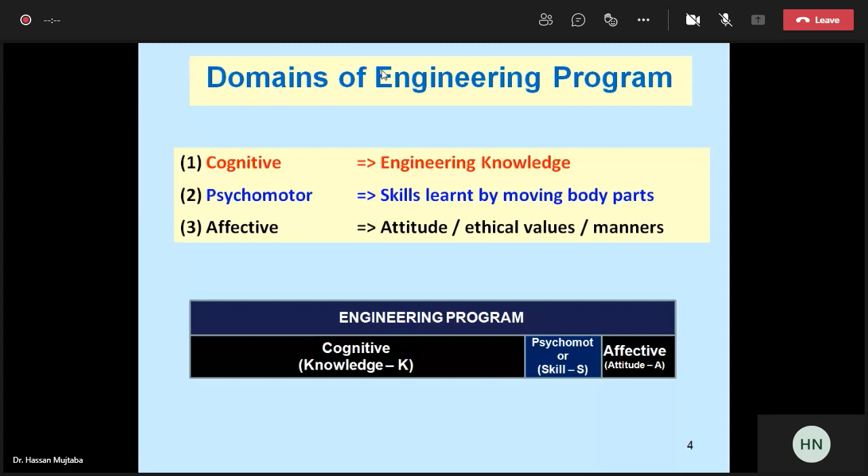Next comes the affective domain, that is attitude, ethical values, manners. All three combine together. Normally when we take the exam, we assess the cognitive domain, psychomotor in the lab, and affective based on the discipline you show in class. So these are the 3 engineering domains which are covered.

Now, the benefit of OBE is that it's a continuous quality improvement process. Based on the experience of previous graduates, or based on your experience and suggestions, topics can be included in the course, or we modify various segments of the course. That is the continuous quality improvement cycle.

Now regarding outcomes or objectives, the first one is the program. Your program is the civil engineering program. PEO stands for program educational objectives, and PEOs are assessed from alumni after 4 or 5 years of graduation. Then comes PLOs, program learning outcomes, assessed from graduates at the time of graduation.

Then CLOs, these are the course learning outcomes. PEOs, PLOs, and CLOs all have to be assessed. PLO is for the program, and CLOs are for one specific course. For transportation engineering, we have 4 CLOs. At the end of this course, you would be able to address these problems or issues.

Now, program educational objectives - there are 4 of them. You must remember, in the corridors when you're coming into the class on campus, they are displayed over there. So you should know that you have 4 program educational objectives.

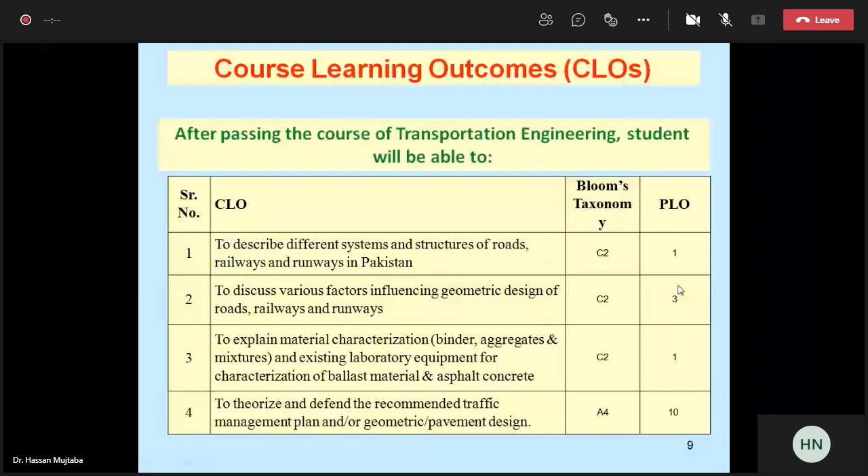So regarding bitumen, please remember one thing - bitumen and asphalt are essentially the same thing.

Americans use the term asphalt cement, while the British use the term bitumen. So it can be used alternatively - bitumen, or asphalt cement, or just asphalt.

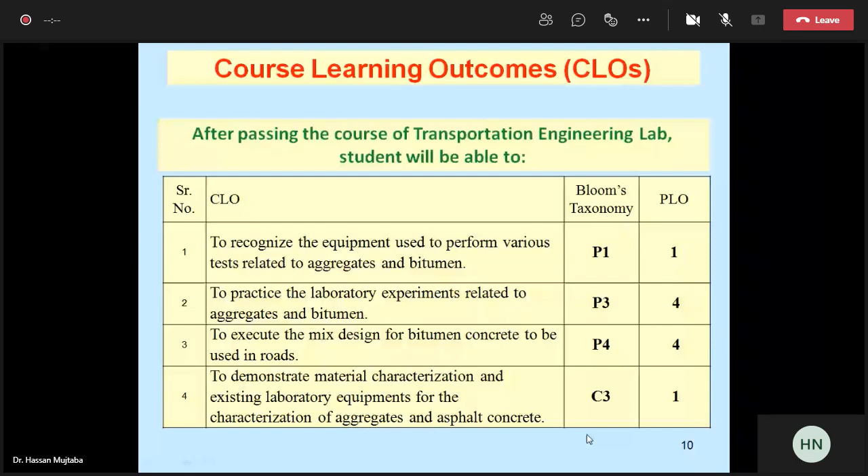Now regarding the reference books for this course, these books are available in the main library reference section. The first one is Highways, fourth edition - maybe the sixth edition is now in the market, but our library has the fourth edition by O'Flaherty. It's a good book.

Then Principles of Highway Engineering and Traffic Analysis by Mannering and Kilareski. Then Introduction to Transportation Engineering by James Banks - you may take this as your textbook for geometric design of roads. We are going to follow this book, especially for horizontal curves and superelevation diagrams. So the lectures are from this Introduction to Transportation Engineering by James Banks.

Now one important thing is, as far as books by Western writers are concerned, they are going to discuss road, railroad, and runway simultaneously. But in case of Asian writers, like Indo-Pak authors, they discuss these separately - separate books for highway engineering, separate for railway engineering, and another for airport planning and design. So these are the books.

Then Transportation Engineering by Khisty and Kent Lall - your traffic analysis studies are from this book.

Then Highway Engineering by Paul H. Wright, Highway Engineering by Oglesby, and A Policy on Geometric Design of Highways and Streets - that is the Green Book by AASHTO.

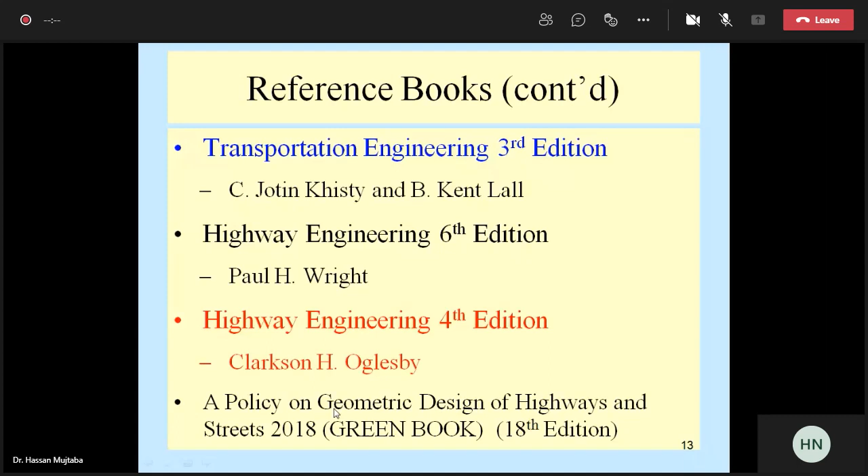Then regarding railway engineering, there is one manual - the Ways and Works Manual, by Pakistan Railway.

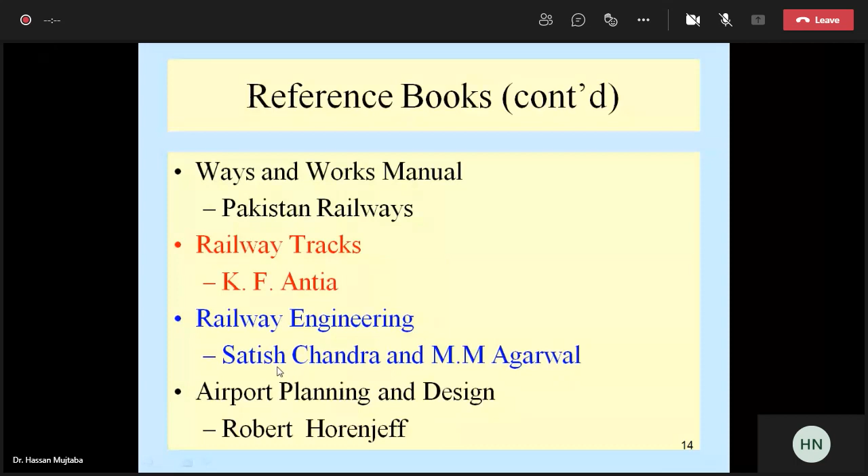Regarding the course contents, we would be discussing what is transportation engineering, a brief intro, then elements of a typical cross section of the road. If we talk about a road, the different elements are the wearing surface on which you are moving, then the base course layer, then the sub-base course layer.

At the bottom you have the subgrade or soil. How to assess the properties of these materials, whether the material you are going to use as subgrade or sub-base material is suitable or needs some improvement. We will discuss this, plus material characterization, which you have studied in geotechnical engineering 1 and 2.

In transportation engineering, you are going to study the characterization of the aggregates, because in your two layers, base course or sub-base course, you require aggregates. So material characterization for the aggregates and material characterization for the binder you are going to study.

Then design speed. How you are going to fix the design speed based on your capacity, lane capacity. Like in case of the motorway, maximum speed is 120 kilometers per hour, minimum speed is 80 kilometers per hour. How have you fixed this speed? Similarly, lane capacity, what is the level of service of the road?

So we are going to carry out the traffic analysis. Based on that, we are going to fix the design speed. Then capacity reducing factors.

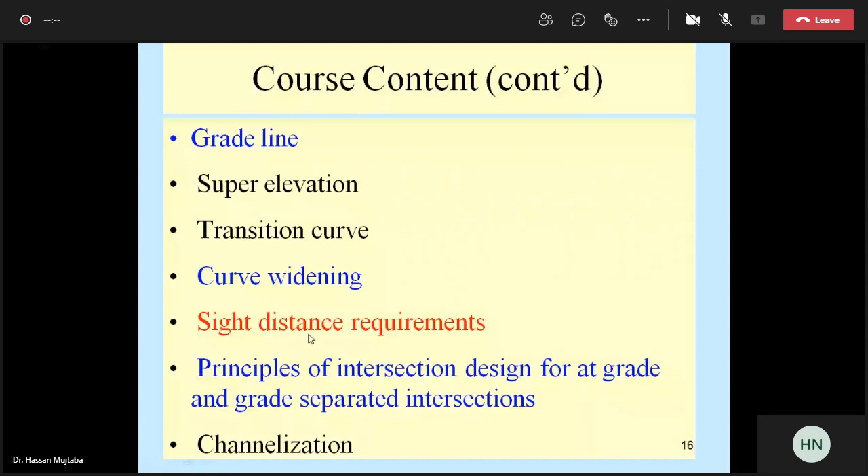Then highway construction materials and their properties and tests. We will discuss this in the lab portion - what are the construction materials, how you can ascertain good quality material to be used in road construction, and what tests you are going to carry out to characterize these highway materials.

Then characteristics of the drivers, vehicles, and roadways. Drivers, then pedestrians - the person walking on foot is the pedestrian. So when you are going to design the road, you have to take this into consideration, especially in urban areas.

What are the characteristics if heavy vehicles are being used - you have seen at every exit and entry point on the motorway, they have placed weighing balances or weighing counters. They just say, okay, you can travel on the motorway if your load is within the prescribed limit. If you exceed the prescribed limit, you are not allowed to travel by motorway.

In case of the GT road, you may see trucks that are overloaded, and that is the cause of quick deterioration of the road. Then traffic surveys - like if there is too much traffic congestion, we may go for some sort of underpass.

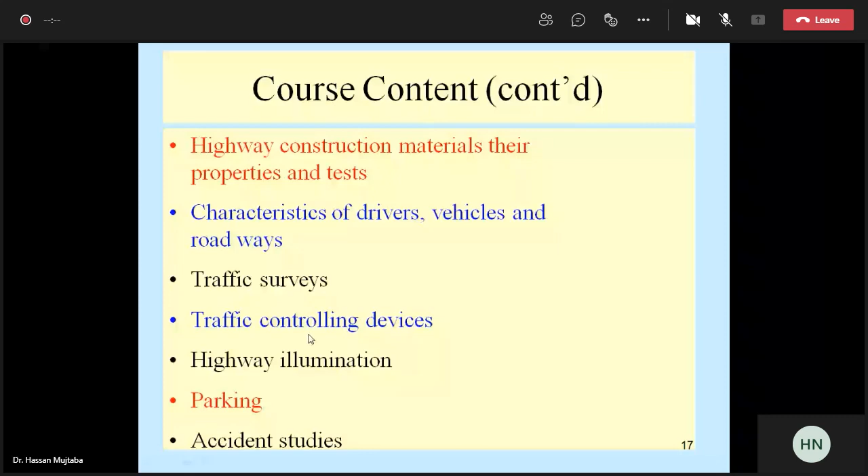Coming towards railway, we are going to discuss the conventional track or the permanent way. Permanent way is basically once the track is laid, it has to stay for the entire life of the track. You may replace it with new ones, but that is why it is referred to as permanent way.

The type of the rail gauges. Gauge is the distance between the two faces of the rails forming the track.

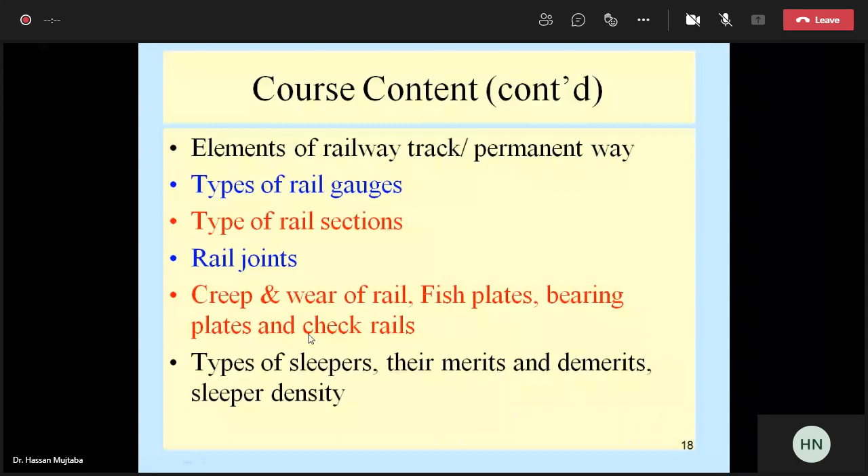Sleepers are basically used to connect the rails; for two rails, one sleeper is used. So their merits and demerits, sleeper density - for a 100 feet length, how many sleepers need to be placed. Basically sleepers act as the support to the rails. For now you should just know that sleepers act as a support; later when we discuss sleepers in detail, things will be more clear.

Then stiffness of the track: how many bogies it can travel safely without deterioration in the track, and without requiring an extra engine. There are certain tracks where you require an extra engine.

So the railway engine is referred to as the locomotive. The term used for a railway engine is railway locomotive. Often in papers it comes up that the railway department is trying to buy so many locomotives, say 10 locomotives.

That is basically the railway engine. Then you have the ballast, requirement for good ballast and renewal of the ballast. Formation of single and double track, formation failures, and layout for the railway station, layout of the station and yards.

Then you have points and crossings. For points and crossings, in case of the road, if you want to divert your vehicle from one lane to another, what you require is you turn the steering first, give the indicator, and move from the first lane to the second lane.

But in this case, you would require a special system of points and crossings, where based on that arrangement, wheels are automatically guided to move from one track to another track.

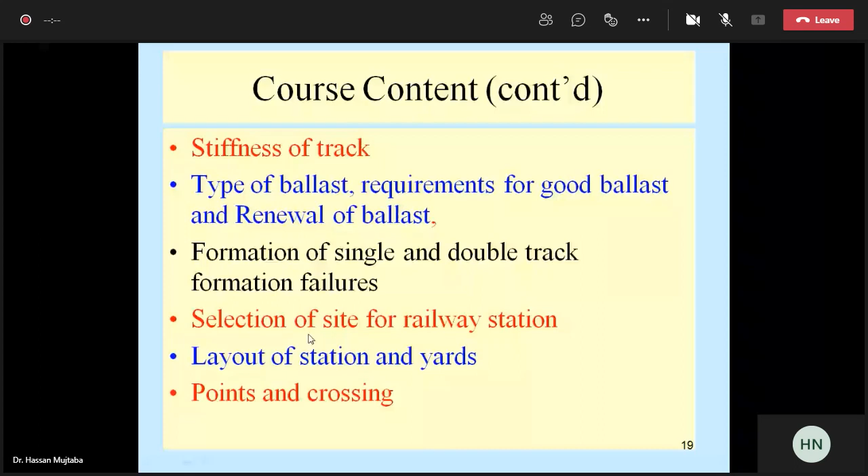Then you are having signaling and interlocking. Majority of railway accidents are due to poor signaling. For example, if the driver got a signal down indication, but afterwards that signal track was occupied, in that case what would be happening - you would be having what you can call an accident.

So signaling and interlocking, then modern methods for the construction of the track, then maintenance tools and organization. So these are the topics related to railway engineering.

Then comes airport planning, airport requirements. Normally what is the purpose of the airport? You want to use the aerial route or airspace. So it may be to transport the passengers. It may be for learning purposes, if you want to learn flying. It may be for some sort of military or defense purposes.

So site selection for the airport, then airport classification, like you classify the soil. What are the systems for soil classification? There are two major systems. USCS and AASHTO. Yes, USCS - Unified Soil Classification System, or AASHTO classification system. Normally Unified Soil Classification System is used for buildings, and AASHTO classification system is for the highways.

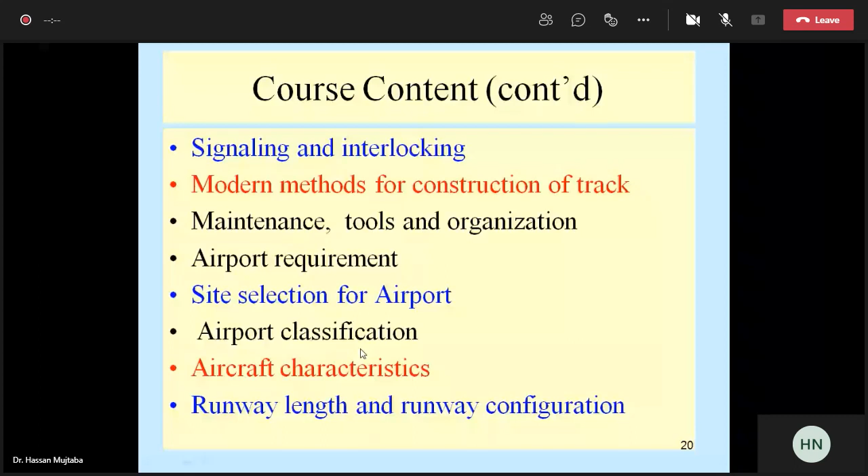Then runway lighting, airport drainage. Important thing about the runway is if you have to go for repair of the runway, you have to get permission from ICAO - that you want to repair this part of the runway, and the airport will not be functional for so many hours or so many days. And after that time you have to make it functional. If you have taken approval to close it for 4 hours, then after 4 hours the runway should be functional. Otherwise ICAO is going to impose some sort of fine on you.

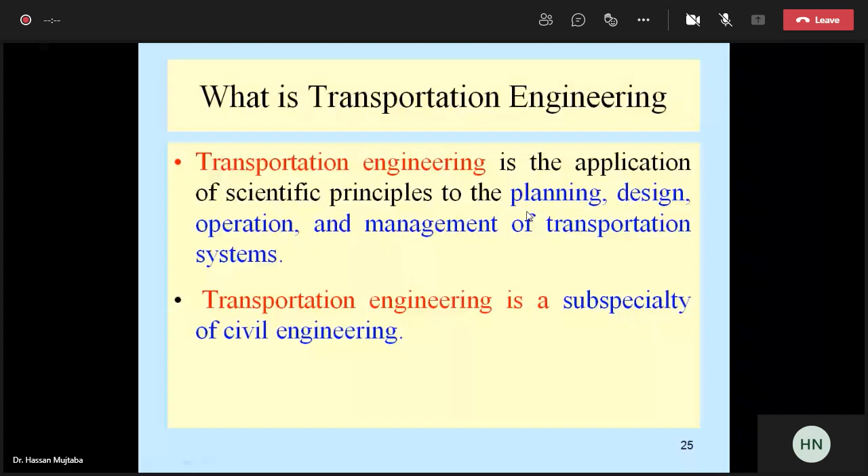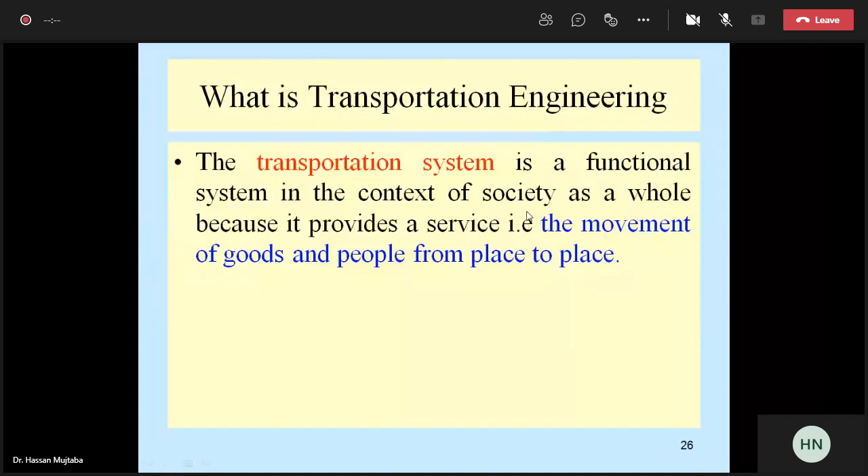So transportation engineering is a vast field and it is a subspecialty of civil engineering. The transportation system is the functional system in the context of society as a whole, because it provides a service: movement of goods and people from one place to another. Transportation system is the major functional system consisting of various components, as it is an essential feature in the economy and personal lives of people everywhere in the world. A highly developed transportation system makes possible the abundance and variety of goods and the high level of personal mobility that are the hallmarks of a wealthy society.

So, if you have to transport vegetables or milk from a village to a main city, and the transportation system is not good, what happens? The vegetables may rot, or the milk may get wasted before it is transported to the cities. So a good transportation system means a wealthy society.

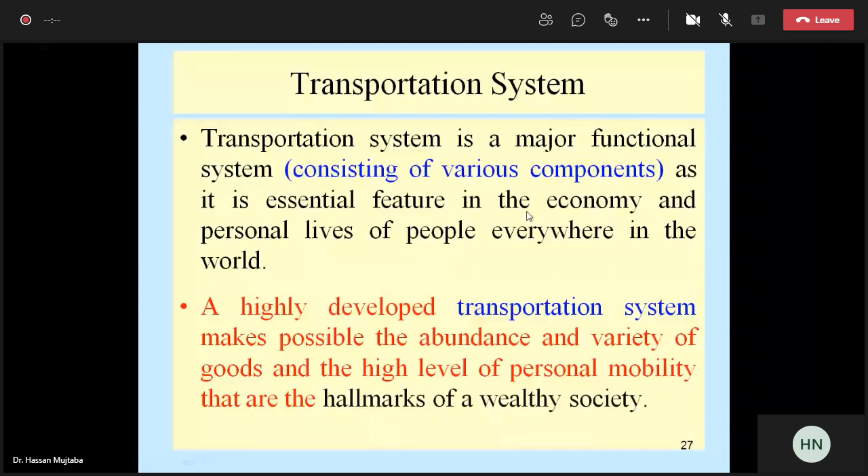So from a functional point of view, the first component of a transportation system is the physical facilities. Physical facilities include streets, roads, highways, railroads, airports, sea and river ports, pipelines, and canals.

In our country, for main roads and urban roads, we use the word road. But in different Western countries, they use the word street, like in Britain, 10 Downing Street, where their prime minister lives. So street or road are used alternatively. Then highways connect two cities intercity. Then railroads, airports, seaports, pipelines, and canals.

Then another facility is the fleet of vehicles. Like in the case of the metro bus, you have heard on television that they are going to bring a new fleet of buses, or they have 42 buses in their fleet, or 50 buses in their fleet. So the fleet of vehicles is another facility moving over the roads.

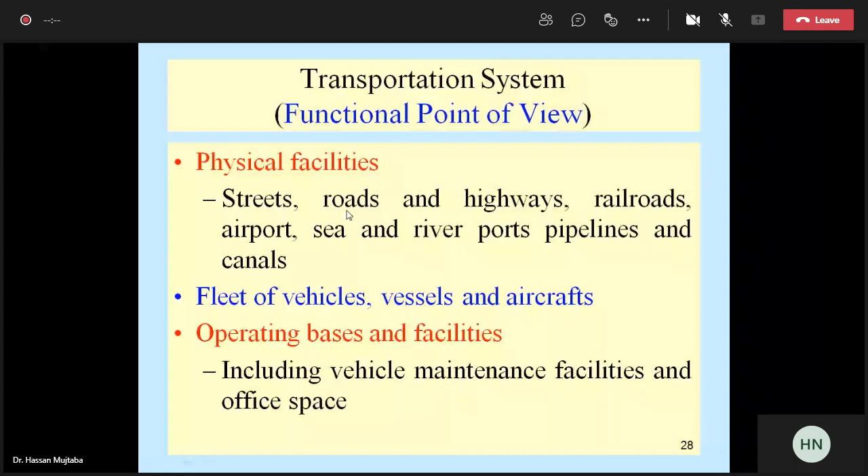Then comes organizations. Facility-oriented organizations are involved in planning, designing, constructing, maintaining, and operating fixed facilities. Like TEPA, Traffic Engineering and Transport Planning Agency. LDA has a sub-office for Lahore where they are going to plan.

Operating organizations, also known as carriers, are concerned with operating a fleet to provide transport services. For the Metro Bus there is a separate authority, for the Orange Train there is a separate authority. So these are basically the organizations.

Some roads are being checked by NHA, some are being supervised by the Communication and Works Department or PWD, Public Works Department. So operating strategies include vehicle routing, scheduling, and traffic control.

For aerial routes like aircraft, the operating strategies are to be given by the civil aviation authority.

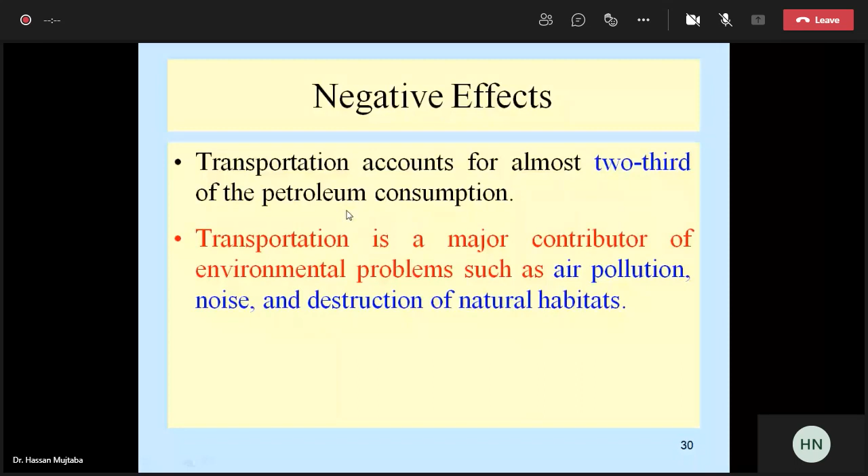Now, modes of transportation. These are the four famous modes of transportation: highway, railway, airway (aerial route), and waterways (water route). So these are the four modes of transportation.

Transportation systems are often analyzed based on their mode of transportation. In urban areas, the freight is trucks for the highways, and passengers use private auto or transit, highway or railway. For intercity, you would be having truck, rail, or ocean shipping, inland water, pipeline, and air. So these are for intercity.

And the third one, special purpose conveyor belts or cable systems. There is one more term used in transportation engineering, that is mass transit.

Mass transit is the mode of transportation, especially in urban areas. It is the combination of highway and rail transportation. So, like they say, a metro bus is a mass transit project. Yeah, and a train, it's a mass transit project.

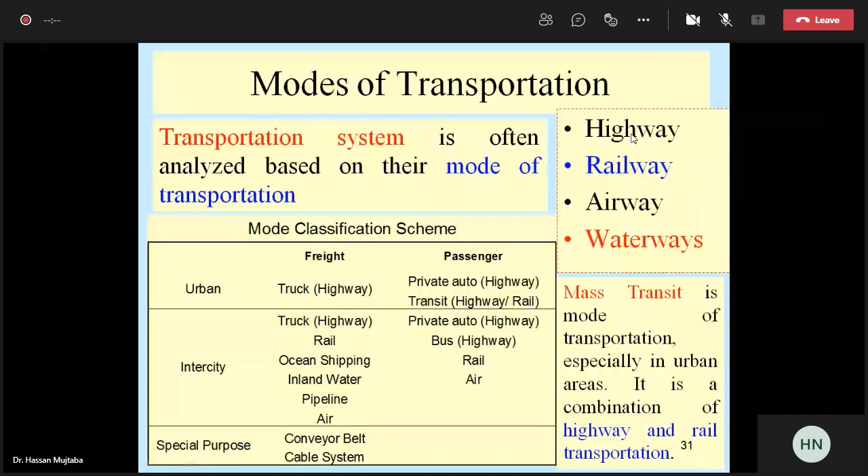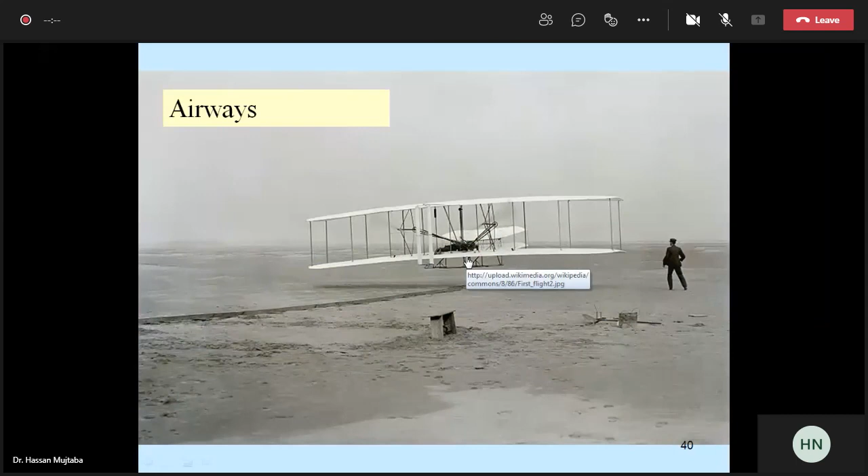Then waterways, then you are using the aerial route, airways. Then pipelines to transport fuel or gas, you may use pipelines.

Then the involvement of civil engineering in transportation engineering. Civil engineering involvement in transportation engineering is primarily for the provision of physical facilities, like in transportation engineering we go for the sizing and geometric design of the highway.

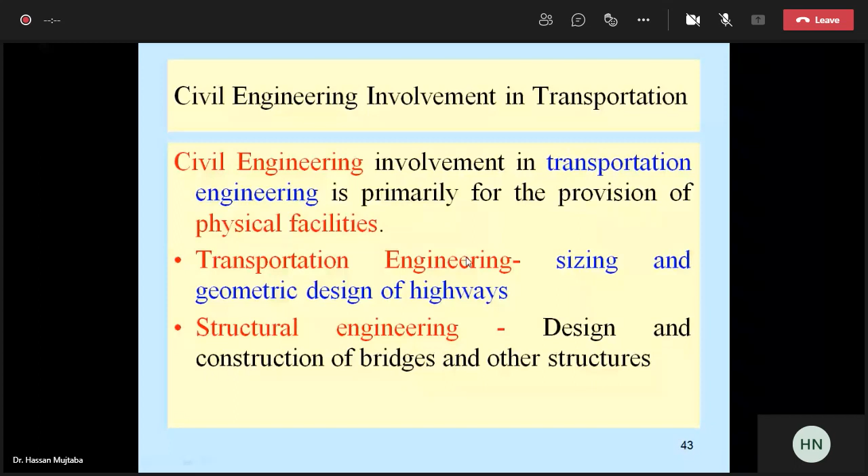I told you that in this course we will be discussing sizing and geometric design of the highway. Then structural engineering: design and construction of bridges and other structures all along the railway, highway, or runway. Terminal building design, tunnel design, bridge design all need to be done.

So that is the role of structural engineering. Then hydraulic and hydrological engineering covers drainage design. Please remember, the main criteria for the proper and efficient design of a good road is drainage. If drainage is good, the road will most probably complete its anticipated lifetime; if drainage is not good, the road will fail prior to its anticipated lifetime.

Then geotechnical engineering covers earthwork compaction and slope stability. So these are regarding geotechnical engineering.

However, civil engineering activity related to planning and operation of the transportation system may be referred to as systems engineering. In the modern world nowadays, intelligent systems are being used to monitor traffic and to monitor any service.

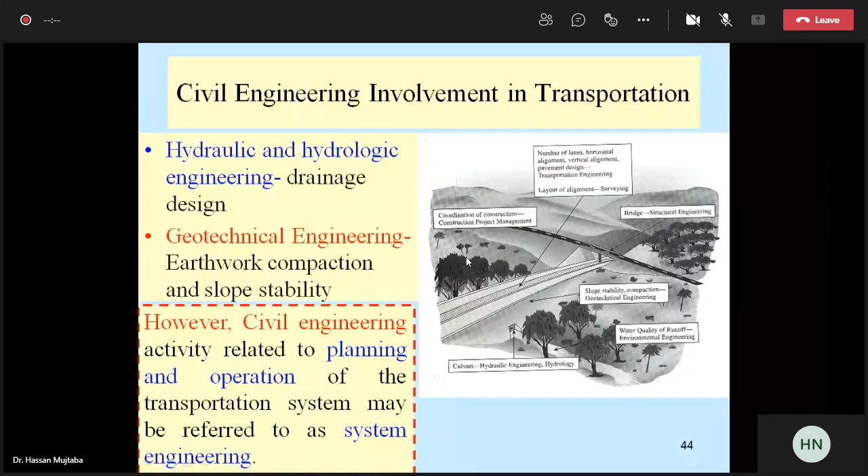Then systems engineering in transportation engineering involves analysis of transportation demand, analysis of the system capacity and operating capacity, and design of the traffic control and operating strategies.

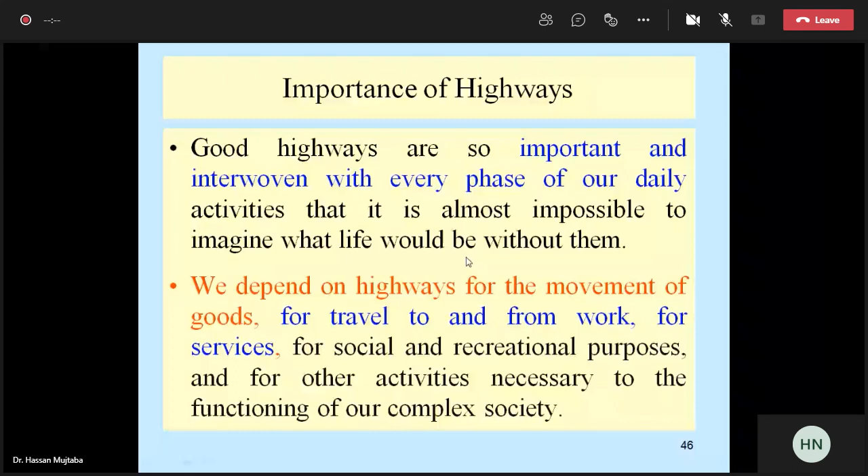As I told you before, the better the transportation system, the wealthier the society - that is one of the key indicators for a society. If it is good, society is happy and wealthy, and if it is not good, society is not happy. So the planning, design, construction, operation, and maintenance of the highways depend largely on the efforts of highway engineers, who must translate the desires of the people for better highway transportation into physical being.

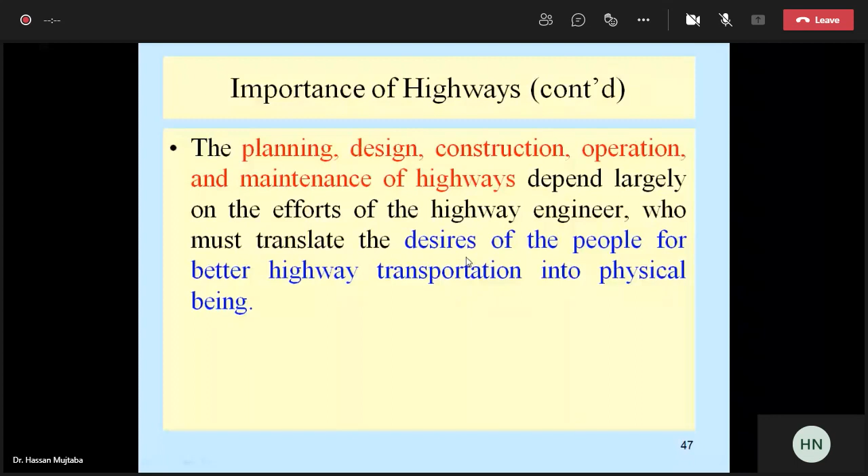Now, regarding a brief history about the highways - should we take a break or should we continue? Yes sir, I was asking whether you want to take a break or should I continue, and take a break at the end? Sir, I think we'll take it at the end. Okay, that's fine.

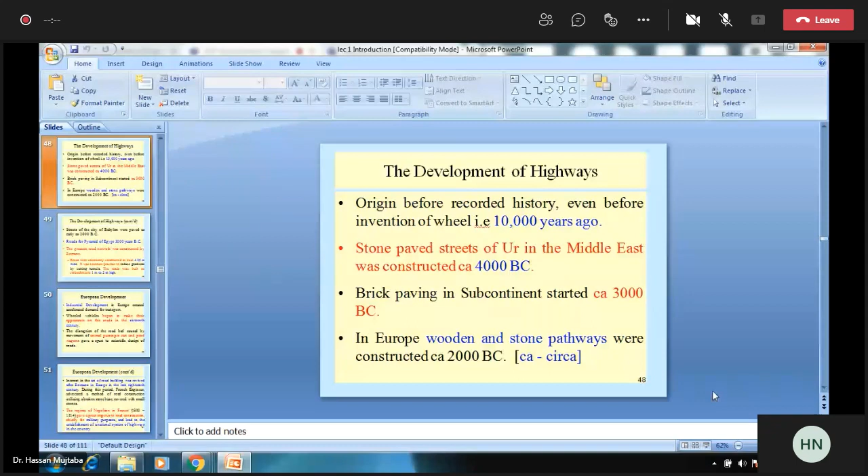So, the development of the highways. Signs of highways, their origin, before recorded history, even before the invention of the wheel, that is 10,000 years ago. Stone paved streets of Ur, a city in the Middle East, were constructed around 4000 BC. CA 4000 - CA stands for circa, a style used to write ancient dates. CA 4000 BC stands for before Christ.

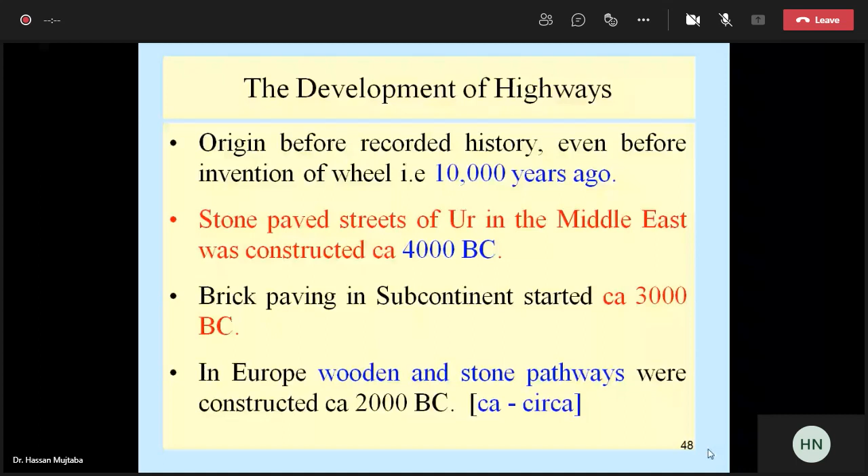Brick paving in the subcontinent started around 3000 BC. In Europe, wooden and stone pathways were constructed around 2000 BC. Streets of the city of Babylon were paved as early as 2000 BC. Roads for the pyramids of Egypt were built 3000 years before Christ.

The greatest road network was constructed by the Romans. The characteristics of the streets constructed by Romans: roads were commonly constructed at least 4.25 meters wide. It was common practice to reduce gradients by cutting tunnels. The roads were built on embankments 1 to 2 meters high. So these are the two statistics - width 4.25 meters and height of embankment 1 to 2 meters.

Now, what do you mean by embankment? What is an embankment? Anyone please answer.

If you don't know, just say sir I don't know. A wall or some hurdle placed in the flow of a river or some water body.

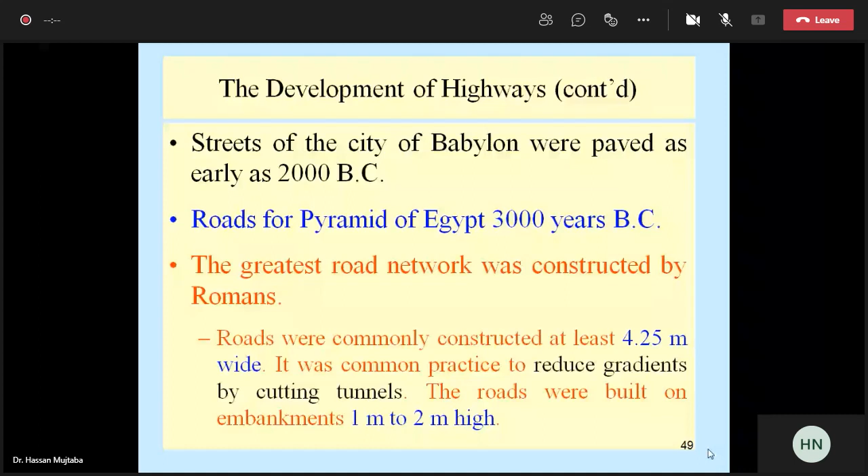Normally, even in case of wars, the armies do not destroy roads, bridges or airports. The reason is that if they have to conquer, they have to use the same path to advance further. So the same is the case here.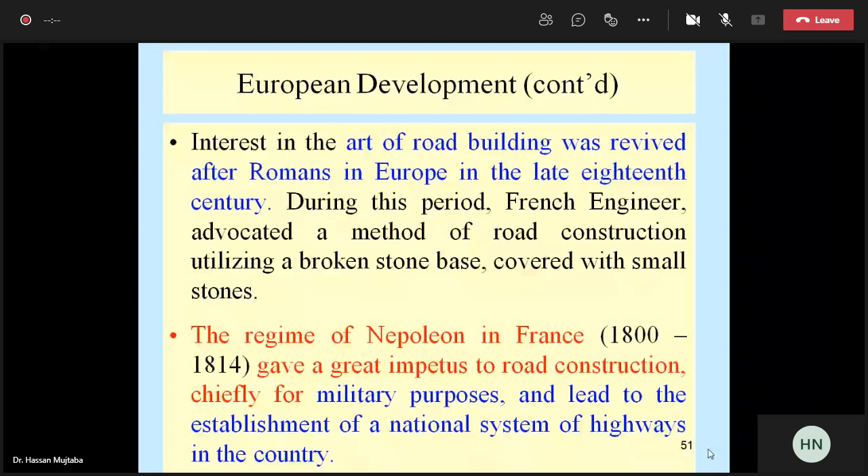Pierre Trésaguet of France was the first to recognize the importance of drainage and methodical maintenance. So the criteria for good design of the road is drainage, one of the most important criteria, which in Pakistan we follow very little. Our drainage portions often get choked, which is why roads fail before their life.

Trésaguet observed the effect of moisture content on the performance of the road. Camber was introduced during this time. Camber is basically raising the center of the road with respect to the edges - the level at the center is made slightly higher while the edges are kept lower. The reason is that when it is raining, water drains out very quickly. So that is camber.

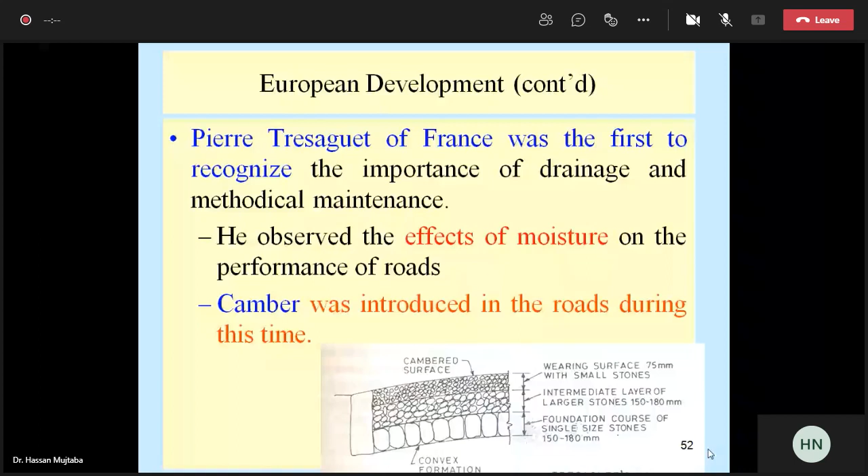John Metcalf is associated with building good and stable roads in the 18th century. He used boulders to achieve a strong foundation for roads and spread gravel as a surface layer. He pioneered the construction of good roads on soft grounds using a sub-base of bundles of heather - heathers being the leaves of a particular plant. On soft ground, he placed a bundle of heather on top so that the impact of load on the soft ground would be reduced.

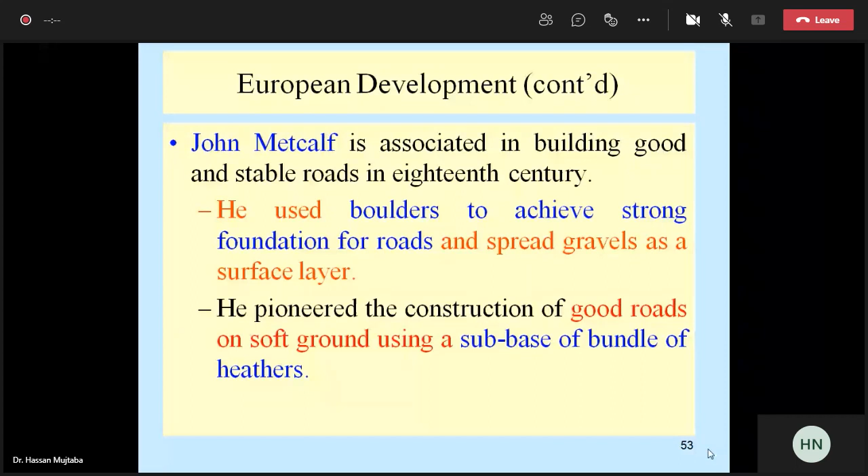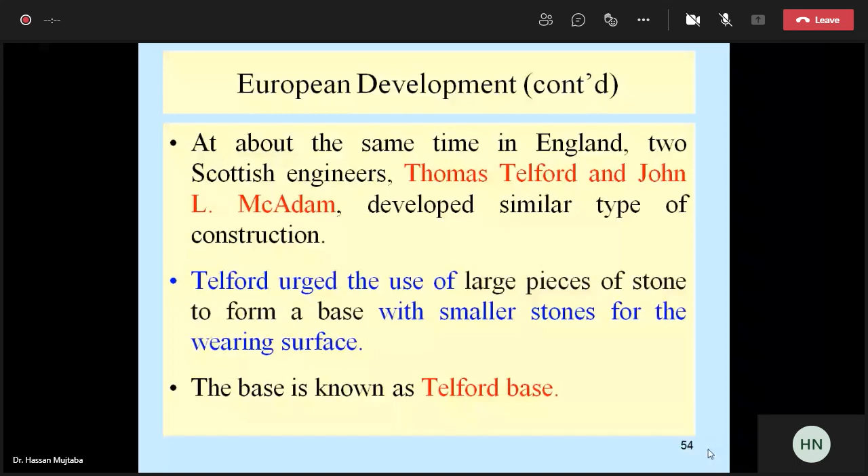At about the same time in England, two Scottish engineers, Thomas Telford and John McAdam, developed similar types of construction. Telford urged the use of large pieces of stones to form a base with smaller stones for the wearing surface - this is known as the Telford base. McAdam advocated the use of small broken stones throughout. This type of construction, you may have heard, is WBM, water-bound macadam.

McAdam proposed this sort of construction where bigger stones are placed below, and to fill them you use stone dust. This type of construction is still in extensive use, being the forerunner of various modern macadam bases and pavements. This one is a Telford base - you see big stones, then as you move up, the size of the stone reduces. The macadam base uses approximately stones of the same size.

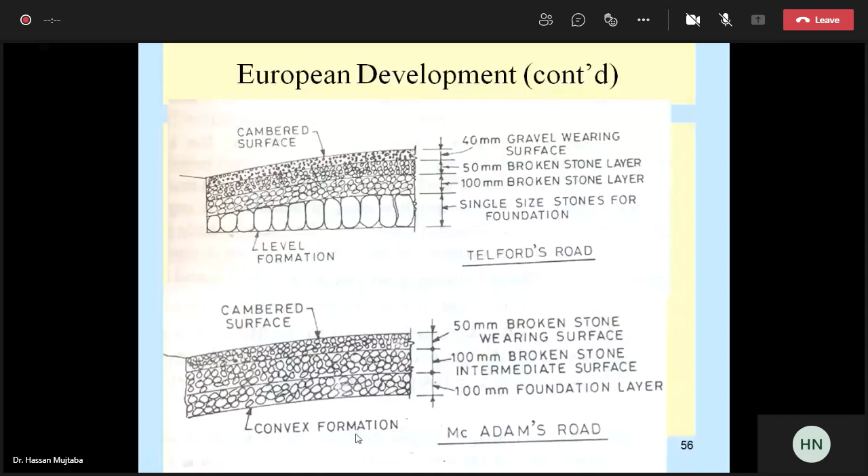Raise the foundation above the surrounding ground so that groundwater will not soften the subgrade. If the ground is soft and you are moving on it, your foot impression gets marked on the ground, but if the ground is dry, no foot impressions are marked. Same is the case - you have to save the road from water penetration. Water should not pond over the road, otherwise the structure of the road would fail very quickly. Then crown the earth subgrade and drain the surface water into side ditches.

Crown the earth subgrade from the center, you are going to lift the earth subgrade so that if by any means water penetrates through the base course layer and sub base course layer, the subgrade should be crowned at the center, up, and down or less at the side, so that water may drain out very quickly.

Then use clean free draining stones. These stones are the free draining material. If dust gets into it and it gets choked, what you have to do is sieve them, remove the fine material, and again place back the stones. So they are basically the free draining material which will drain the water and not be affected by frost.

Why? Frost is not desirable in areas where temperature is going to fall below 0 degrees centigrade. If water is going to freeze, its volume increases. Increase in volume may cause disruption. That is why you need good quality stone, and you have to also measure the water absorption of the stone before using them as base course or sub base course. Normally 3 to 4% water absorption is allowable in road construction.

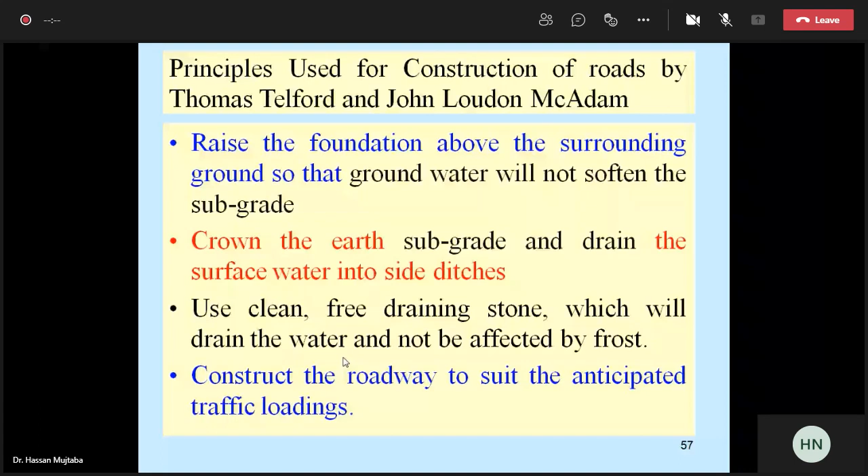Then comes all components of the modern highway design that were being utilized in 1320 in England. Telford used a masonry surfacing and lateral drains every 100 feet, while McAdam used one size stone wearing surface. McAdam favored smaller stone pieces with angular faces, while Telford favored large hand-packed boulders. The use of these principles rapidly spread to the United States with the construction of Boonesborough Turnpike Road in 1823.

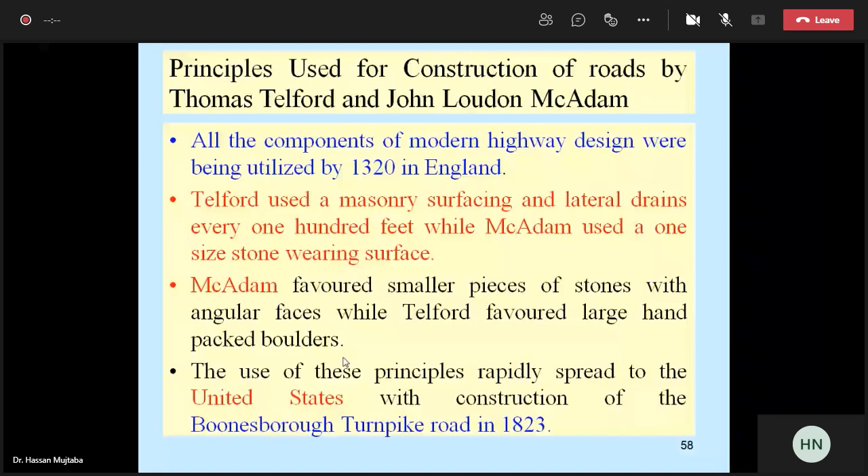Then different definitions of common terms in highway engineering. First one, highway. What is a highway? Highway is an arterial road facility designed for high speed, high volume traffic in a non-urban area, used to connect two cities or two towns.

Then road is a line of communication between places for use of foot passengers, pedestrians, riders, vehicles. Within a city, whatever roads are there, they are called roads. I told you street, that is also an urban roads facility. In our country, street is the localized road which leads to your residence, so that is referred to as the street, or the word lane or street is used for it. And roads which are main roads, for those we are using the word road. But in different countries, streets are also used in the meaning of road.

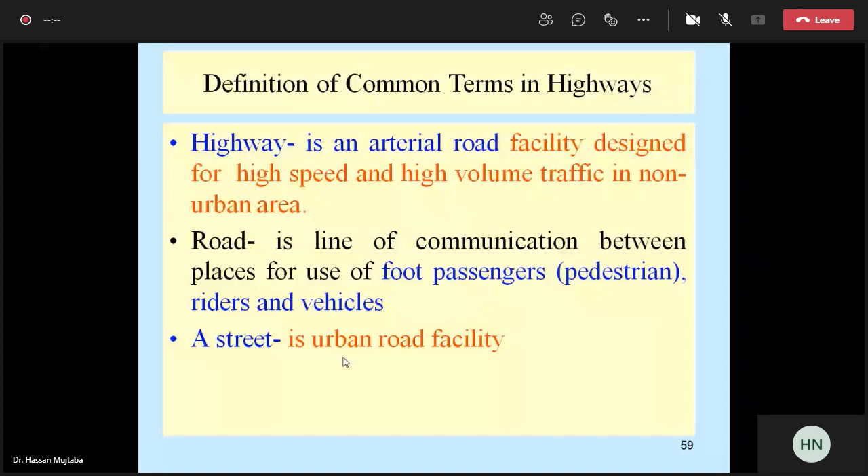Then expressway, here you have to concentrate. Expressway is the superior type of highway with full or partial control of access and generally grade separated at intersections. Murree Expressway, then what you have is the ring road, it is an example of an expressway, a superior type of highway with full or partial control of access.

So freeway is the superior type of highway with full control of access. Full control means if you have to move on the road, you have to get permission, like toll plazas, you have to enter a toll plaza and exit a toll plaza if you are using a freeway or motorway.

Plus grade separated at all intersections, in this case you are having grade separation at all intersections. But in case of expressway, what you are having is maybe some at-grade intersections, they are also present where at tough locations you say, let's just give an at-grade intersection.

One thing, control of access is optional, it may be full or partial. So expressway or freeway, freeway we are going to say motorway, normally British use the word motorway. Americans use the word freeway or expressway, in American literature you get these two words.

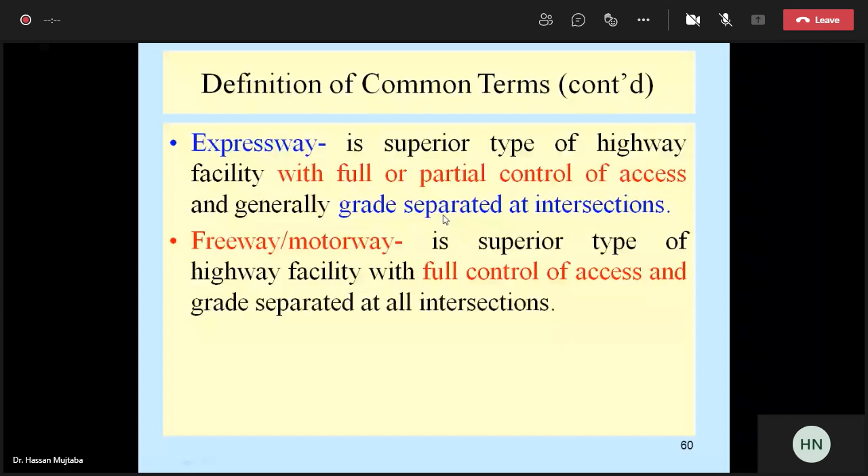Then motorways, if we talk about different roads of Pakistan, we have a network of high quality international standard limited access highways in Pakistan, which are maintained and operated by the National Highway Authority, NHA. Pakistan motorways are either 6 lanes or 4 lanes and are limited access with a minimum speed of 80 kilometers per hour and a maximum speed of 120 kilometers per hour.

So these are the speed restrictions, otherwise if you cross them, at various places they have speed guns, and they fine you if you are crossing or exceeding the limit.

They have a central median and are fenced on the outside for safety and to prevent unauthorized access. By 2021, operational motorway in Pakistan has a combined length of 2505 kilometers, with another 1489 kilometers planned or under construction.

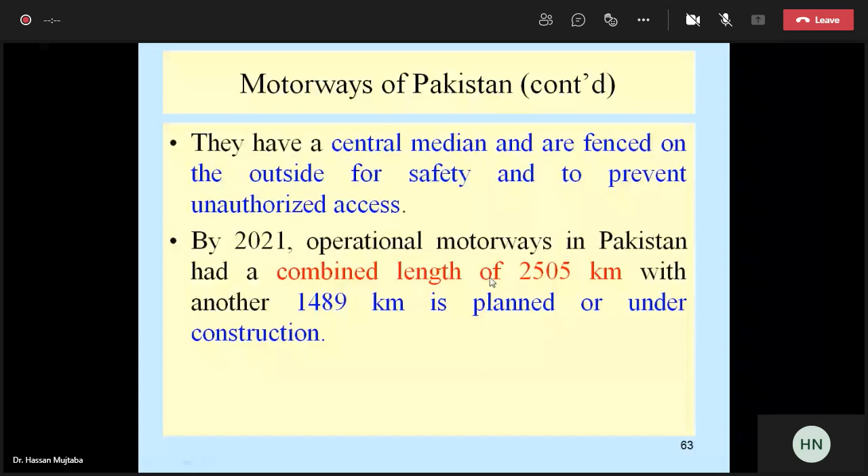Entry to all motorways in Pakistan is restricted to fast moving vehicles only. Two-wheelers, motorcycles and bicycles are slow moving traffic modes and are not allowed. However, motorway police personnel use heavy motorbikes for patrolling purposes. Construction and agricultural machinery is also restricted.

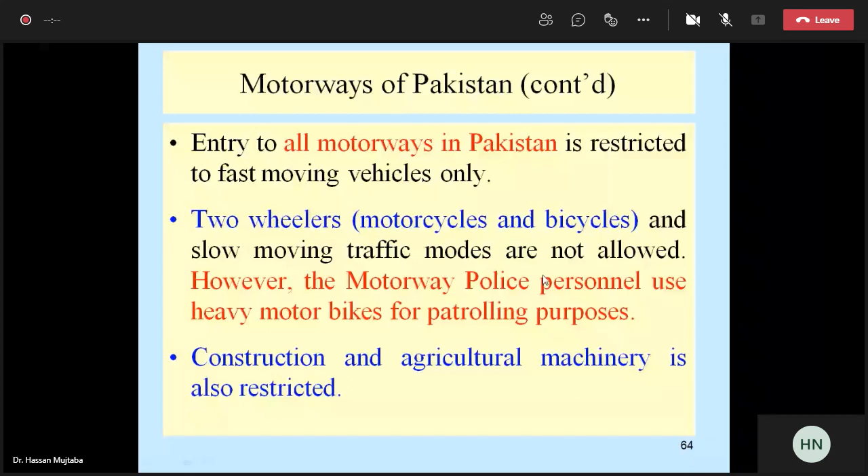The construction of motorway in Pakistan was first proposed between Lahore and twin cities of Rawalpindi and Islamabad. The idea behind a motorway was supported by many in the country. However, many wanted the first motorway to be built between the two largest cities, that is Lahore and Karachi.

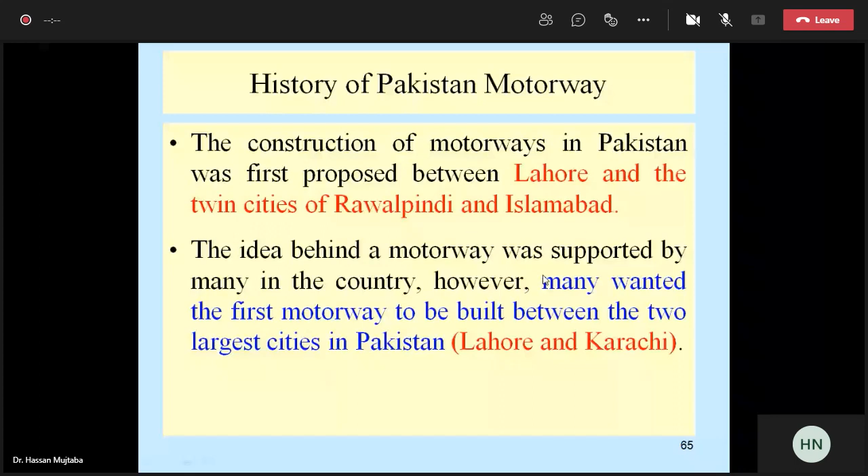However, the plan went ahead and Pakistan's first motorway M2 was completed in 1997, and was the first motorway to be built in South Asia. The contract was awarded to Korean firm Daewoo. It has 6 lanes and linked the federal capital Islamabad with Punjab's provincial capital Lahore, with a length of 367 kilometers.

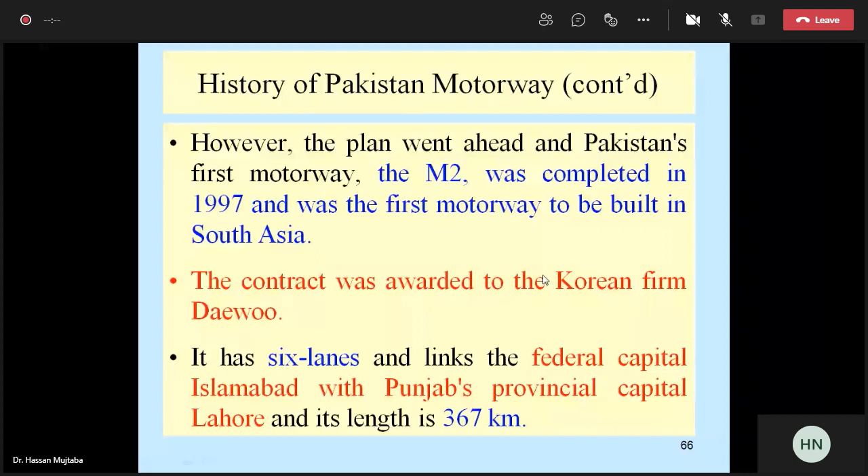Since then, the road network has further been extended to Sargodha, Faisalabad, which has 4 lanes and a length of 53 kilometers. The M1 from Islamabad to KPK capital Peshawar was completed in 2007. It has 6 lanes and a length of 154 kilometers.

Pakistan also has a nationwide system of national highways, distinct from the motorway, which are currently being built. The National Highway Authority is responsible for all the national highways. National highways begin with the letter N. N stands for national, not north. N is for national, followed by two numerals and a hyphen.

For example, N75. Some national highways are also given with the letter S for strategic highway, or E for expressway, followed by two numerals separated by a hyphen. So N for national, S for strategic, and E for expressway.

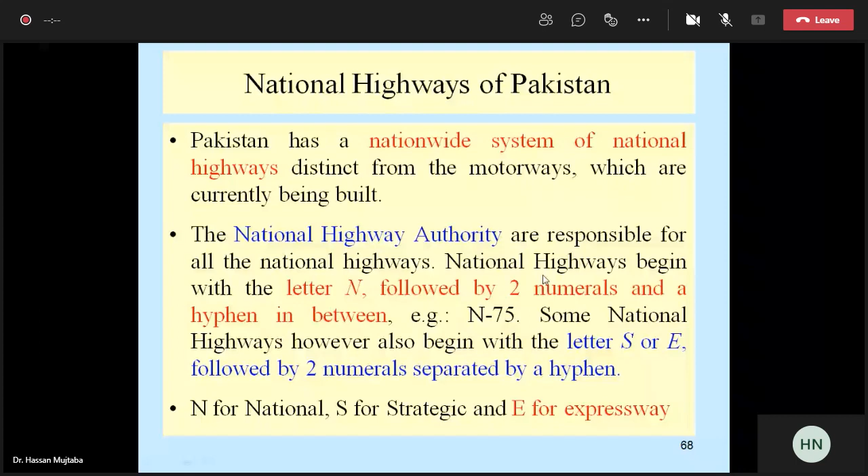One of them is N5, which extends from Karachi to Torkham via Hyderabad, Multan, Lahore, Rawalpindi, and Peshawar. The Lahore-Peshawar section is also known as the GT Road or the Grand Trunk Road. The British-built GT Road also extends east to the Indian border and subsequently continues all the way to Calcutta. Its total length is 1819 kilometers, from Karachi to Torkham.

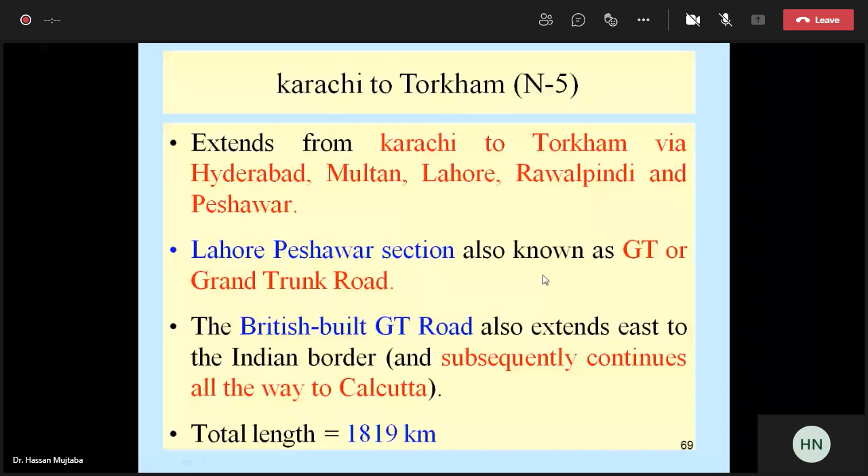Then N15 extends from Mansehra to Chilas via Naran and Jalkhand. Its length is 240 kilometers.

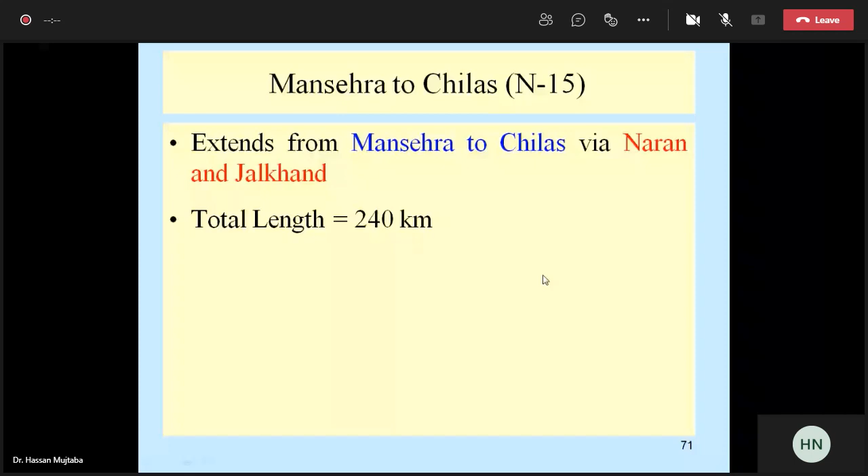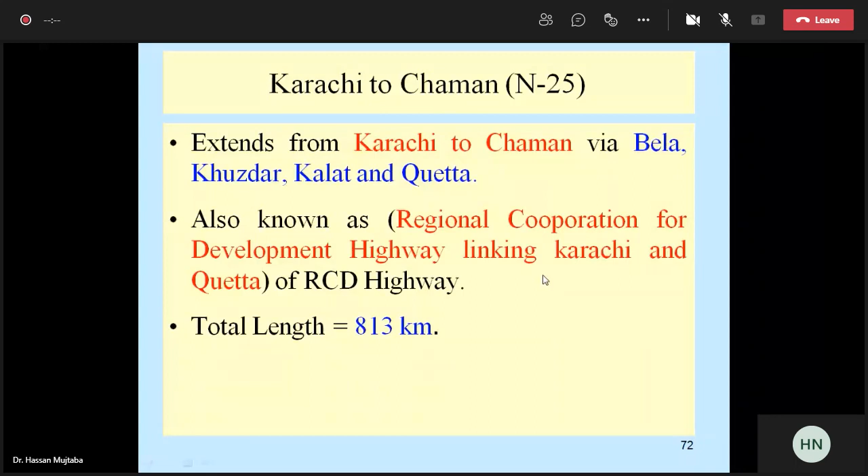Then Karachi to Chaman extends via Bela, Khuzdar, Kalat, and Quetta. It is also known as the RCD Highway, Regional Cooperation for Development Highway, linking Karachi and Quetta, with a length of 813 kilometers. Then the Karakoram Highway, N35, from Hasan Abdal to Khunjerab Pass, total length 806 kilometers, extends via Abbottabad, Thakot, and Gilgit.

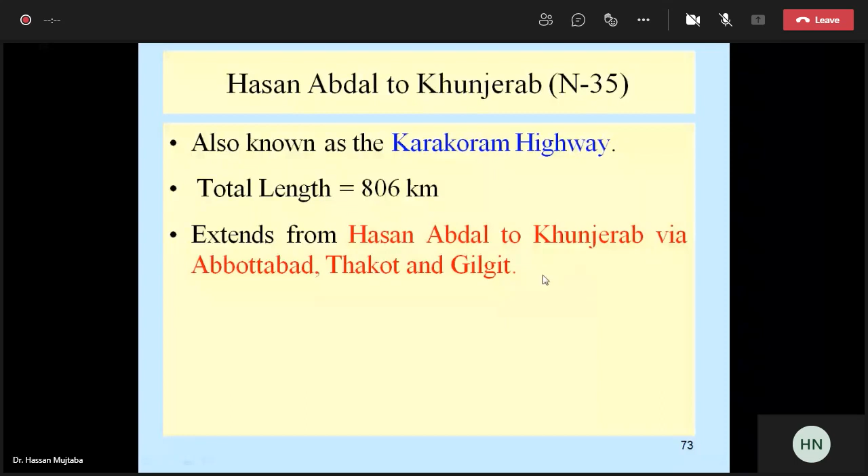So these are just for your information, a list of various national highways of Pakistan. Just for your information, if you want to find out which highway is in your locality, in your vicinity where you live, that is basically just for your information.

Then we have 3 strategic highways. One extends from Gilgit to Skardu, connecting Gilgit to Skardu, required for transporting goods, otherwise the track was very difficult. Then one extends from Kohala to Muzaffarabad, and from Muzaffarabad to Chakothi. So these are the 3 strategic highways.

Then we have the expressways E3, E4, and E5. They extend from Wazirabad to Pindi Bhattian, Faisalabad to Jhang, and from Khanewal to Lodhran. So these are the expressways.

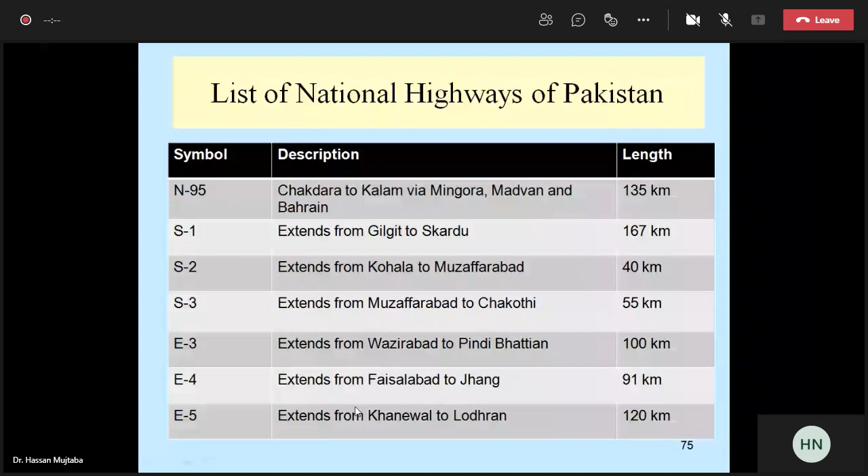So N5, GT Road, Grand Trunk Road, basically a national highway. National Highway 5, part of the Grand Trunk Road, runs from Karachi to Torkham, the longest road of Pakistan at 1819 kilometers, running north from Karachi in Sindh to Hyderabad, Moro, and Khairpur, before crossing into Punjab, where it passes through Multan, Sahiwal, Lahore, Gujranwala, Gujrat, Jhelum, and Rawalpindi.

At Rawalpindi, it turns eastward and passes to Attock before crossing the Indus River into KPK, where it passes through Nowshera and Peshawar before reaching the border town of Torkham.

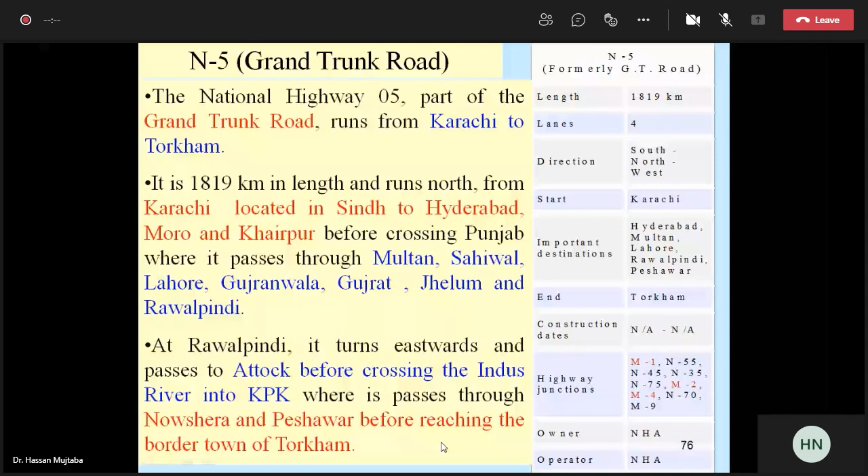N5, Grand Trunk Road, has a total length of 1819 kilometers: 1021 in Punjab, 671 in Sindh, and 127 kilometers in KPK. It is managed by the Pakistan National Highway Authority. N5 is built on the ancient Grand Trunk Road. After partition, a vast portion of GT Road came under Pakistan. Thus development of this road took place, and in the 1990s, the road was converted into an international standard highway.

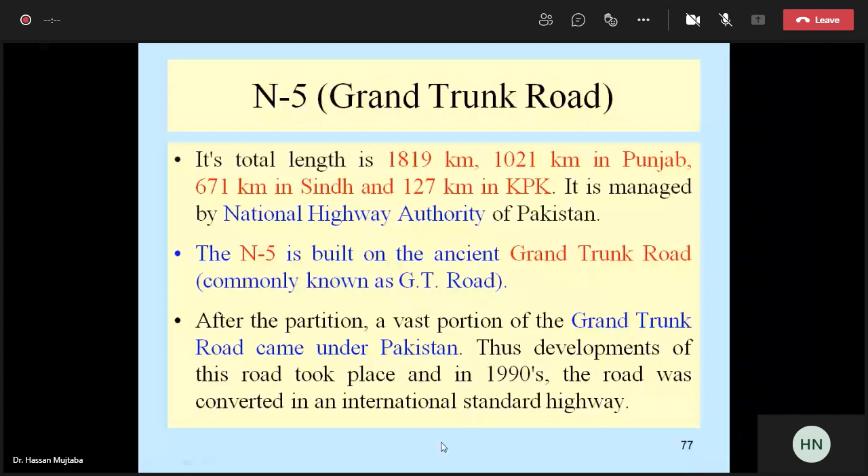In Pakistan, the old GT Road ends at the suburban town of Wagah near Lahore at the Pakistan-India border. There were some routes in Pakistan also known as GT Road: Peshawar to Lahore, Multan Road, Lahore to Multan, Rahim Yar Khan, Bahawalpur to Rahim Yar Khan, and Karachi Road, Sukkur to Karachi. NHA planned to combine these roads into one highway, and thus N5, the new GT Road, came into existence.

A huge upgrade took place on these routes in the mid-90s, and N5 was converted into a 4-lane, 1819 kilometer long highway. It is the longest and most important highway, and whatever ground route trade is happening, it is through this N5.

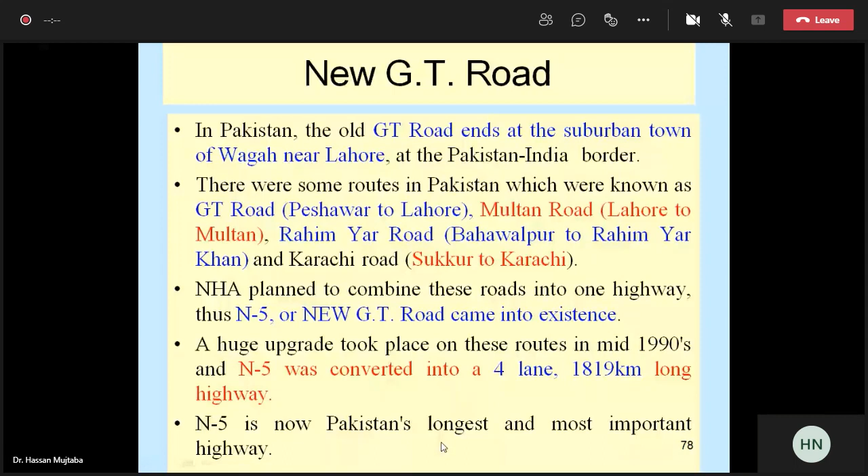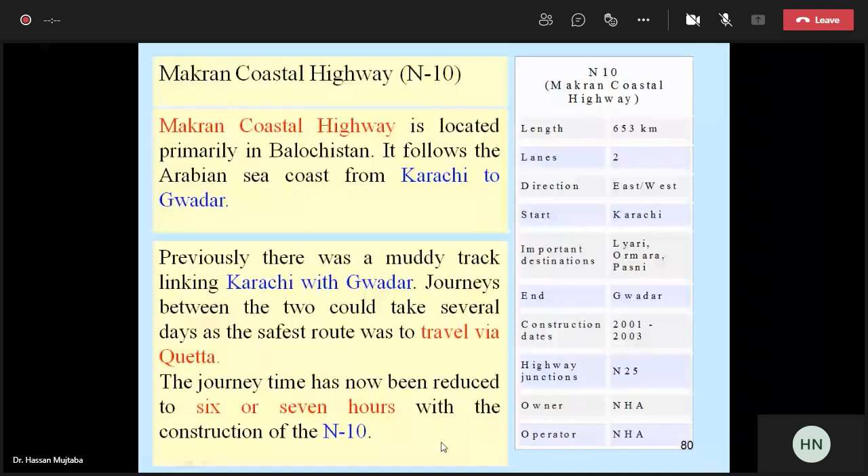The Makran Coastal Highway was built as part of an overall plan to improve transport facilities in southern Balochistan. Other parts of the plan include a new seaport and international airport at Gwadar, and construction of the road linking Gwadar to Khuzdar.

The basic reason this was developed is that in coastal areas of Balochistan, the main livelihood is fishing. The catch could not be sold in Karachi because the fish would rot by the time they reached there. However, the new highway has improved people's livelihood by giving them the opportunity to sell fish in major markets in Karachi. So, a view of the Makran Coastal Highway.

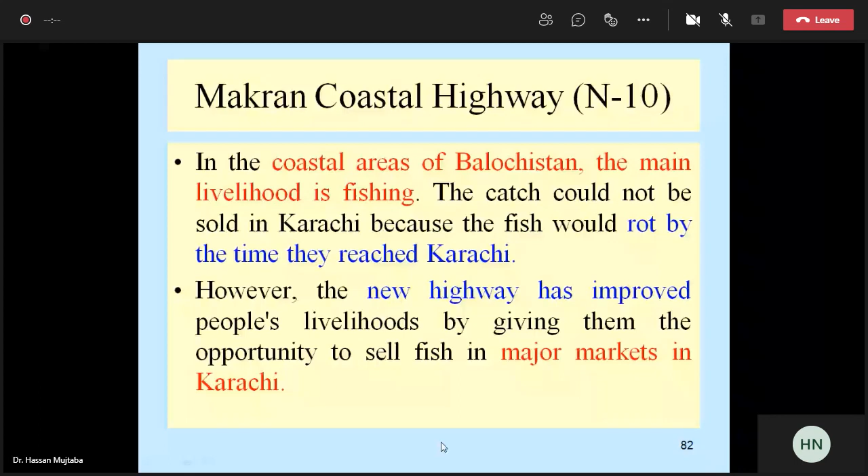Then the Karakoram Highway, N35, the Silk Route. The Karakoram Highway is the highest paved international road in the world. It connects China and Pakistan across the Karakoram mountain range through the Khunjerab Pass at an altitude of 4693 meters. It connects China's Xinjiang region with Pakistan's northern areas and also serves as a popular tourist attraction.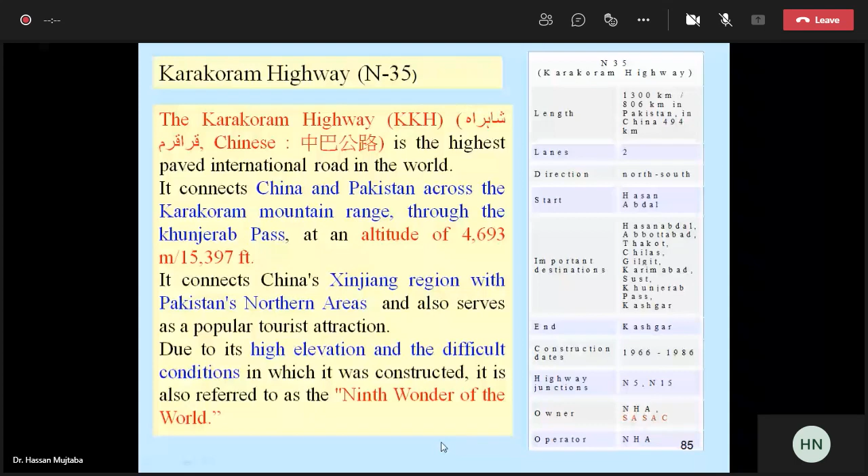Due to its high elevation and the difficult conditions in which it was constructed, it is also referred to as the ninth wonder of the world. The Karakoram Highway, also known as the Friendship Highway in China, was built by the governments of Pakistan and China and was completed in 1986. After 20 years of construction, 810 Pakistani and 82 Chinese workers lost their lives, mostly in landslides and falls while building the highway.

The route of KKH traces one of the many paths of the ancient Silk Road. On the Pakistani side, the road was constructed by FWO, the Frontier Works Organization, employing the Pakistan Army Corps of Engineers. Note that in 'Corps', the P is silent.

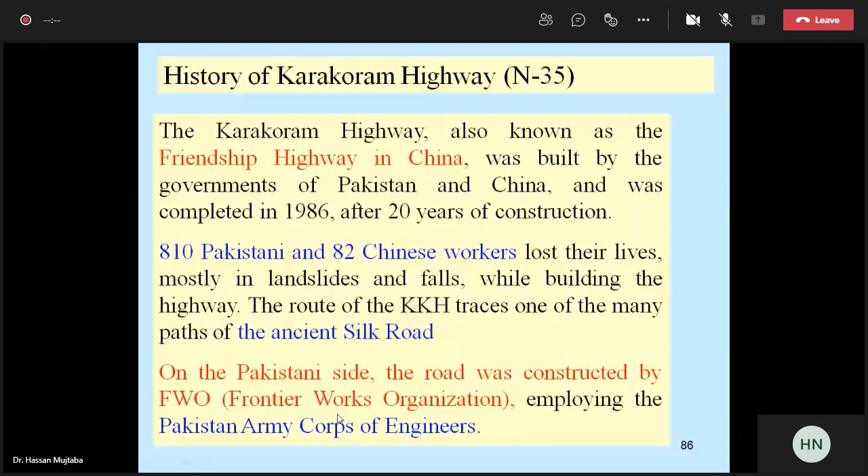A view of the Karakoram Highway. Another view. Due to landslides, the road is being blocked, so the landslide material, the debris, is being moved.

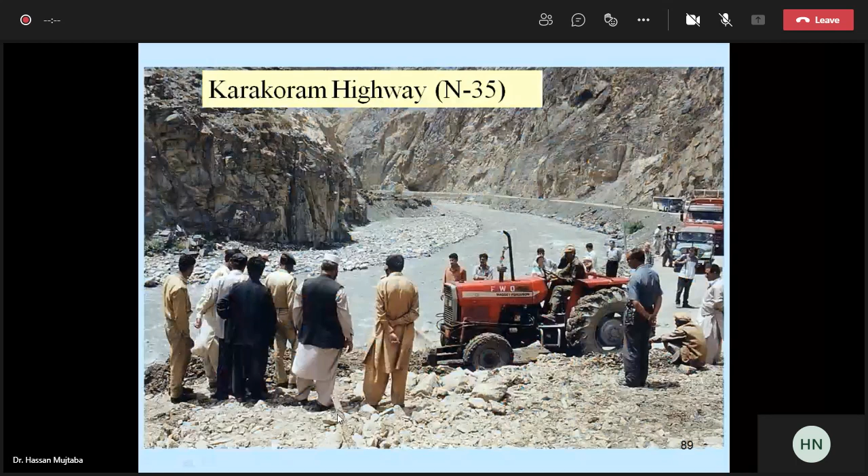Then coming towards highway materials. Highway materials consist of three segments: one is the soil, another is the aggregate, and the third is the bituminous material or binders. Soil, which is the bottommost part of the road, is the subgrade.

To measure its characteristics, you carry out experiments in geotechnical engineering. To characterize a soil, you perform the liquid limit test, plastic limit test, and sieve analysis. Based on that, you can classify the soil and determine at least which soil classification group it belongs to.

To find out compaction characteristics, you have to carry out the compaction test. You can perform a standard compaction test or modified compaction test in the lab to get the maximum dry density. Please remember that in the case of roads, you have to carry out the modified compaction test.

Then coming towards the aggregates. For aggregates, you are going to carry out tests regarding the shape of the aggregate and regarding the hardness of the aggregate. So now let's discuss which tests we perform for aggregate, and then the bituminous material or the binder.

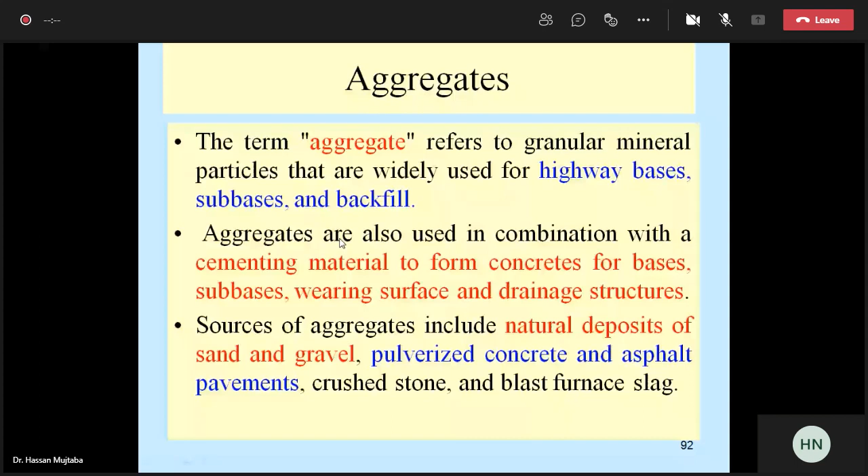Then properties of the aggregates. Properties of the aggregates includes particle size and gradation. Particle size जैसे आप soil का sieve analysis करते हैं, so on same grounds, we can go for the particle size and gradation of the aggregates.

Then hardness or resistance to wear, because when you are going to use the aggregates for road construction, due to the impact or certain application of the brakes, impact is being generated. So hardness or resistance to wear.

Then durability or resistance to weathering, specific gravity and water absorption. Then chemical stability, particle shape and surface texture, freedom from the deleterious particles or substances. So these are the various properties of the aggregate.

अगर मैं आपको एक aggregate provide कर देता हूँ and I say characterize them and say either these aggregates are good for road construction or they are not, तो उसकी gradation या particle size determine करने के लिए आपको sieve analysis के लिए जाना होगा.

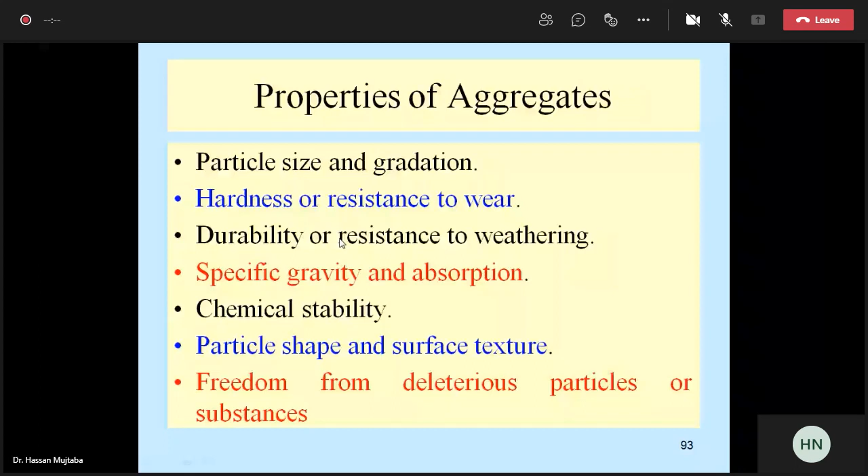So a key property of the aggregate used for highway bases and surfaces is the distribution of the particle sizes in the aggregate mix. The gradation of aggregates, that is the blend of particle sizes in the mix, affects density, strength, and economy of the pavement structure. A grain size analysis is used to determine the relative proportion of various particle sizes in an aggregate mix.

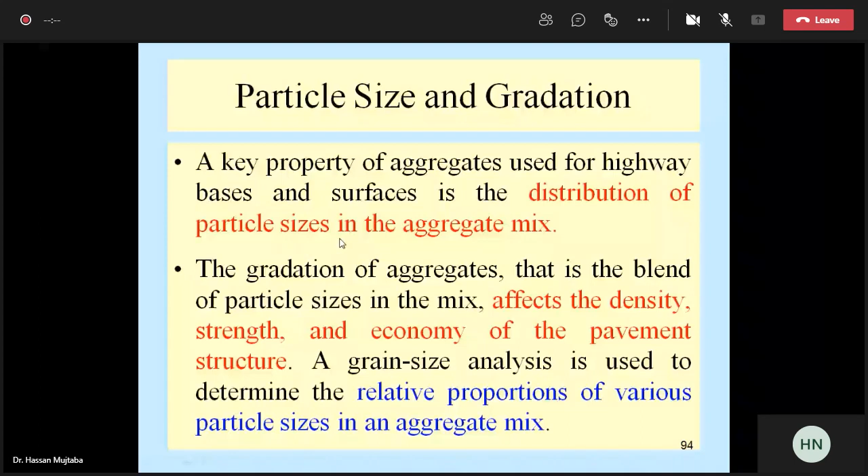So the grain size analysis data are usually plotted on an aggregate grading chart as shown in the figure in the next slide. With the aid of such chart, engineers determine preferred aggregate gradation and require that the gradation of aggregate used for highway projects conforms to the limit of the specification band.

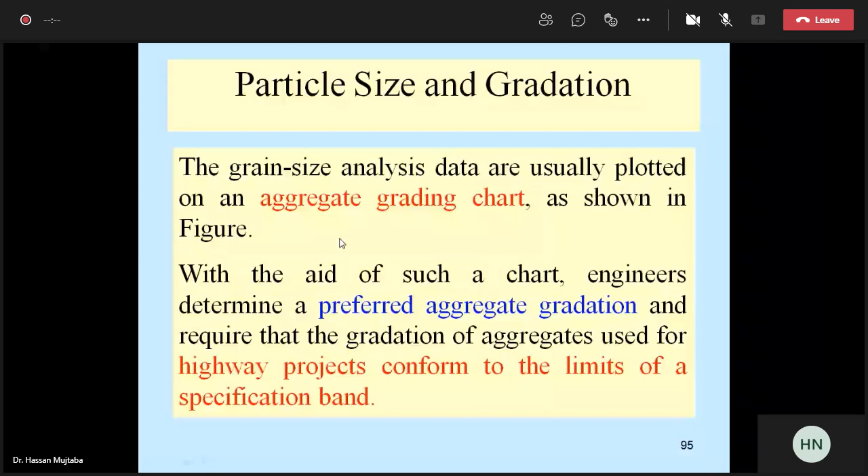Now coming towards transportation engineering, इसमें normally we are having the aggregates to 3 inch, 2.5 inch, 2 inch, 1.5 inch, 1 inch, 3/4, then 0.5, then 3/8, उसके बाद 1/4. These are the sieves which are being used.

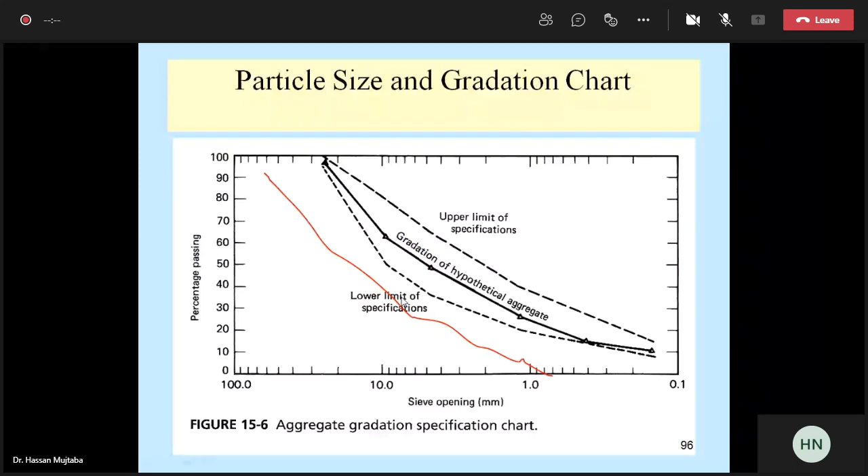Then resistance to wear. Material used in the highway pavement should be hard and resist wear due to loading from compaction equipment, and the polishing effect of the traffic. So what is the polishing effect of traffic? कि आपकी कार जो है wearing surface के ऊपर move कर रही है.

So the aggregates under the impact of your tires, they try to move over one another. उसके ऊपर binder या they are being bound by the bitumen, तो उनकी movement जो है that is being restricted. What happens कि with the passage of time their surface it gets polished.

जो base course का या sub base course का material है, it is the unbound material. जब load transfer होगा from the movement of the vehicles, the aggregates they try to move over one another. So based on that, what's going to happen कि उसके लिए the surface it gets deteriorated, aggregate की degradation हो रही है, the surface of the aggregate it gets polished.

सर किया हुआ जी, Los Angeles abrasion test, that is a test being carried out to measure the hardness. The machine used in the Los Angeles abrasion test consists of the hollow steel cylinder closed at both ends and mounted on a shaft in the horizontal position. So that is the machine, it has one lid.

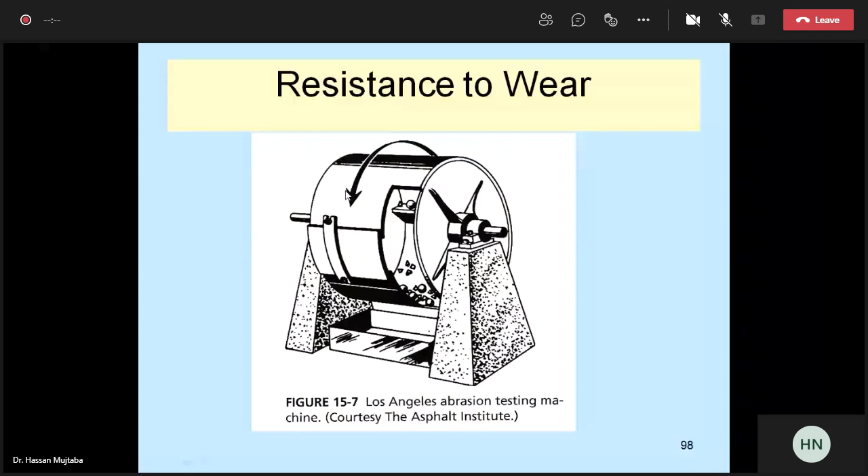To perform Los Angeles abrasion test, a clean sample of aggregate to be tested is placed in the cylinder along with the standard weight of steel spheres as abrasive charges. वो steel balls हैं या abrasive charges हैं, तो please remember कि जो 12 abrasive charges हैं उनका जो weight है that is 5 kg. The drum is then rotated at a speed of 30 to 33 rpm for 500 revolutions.

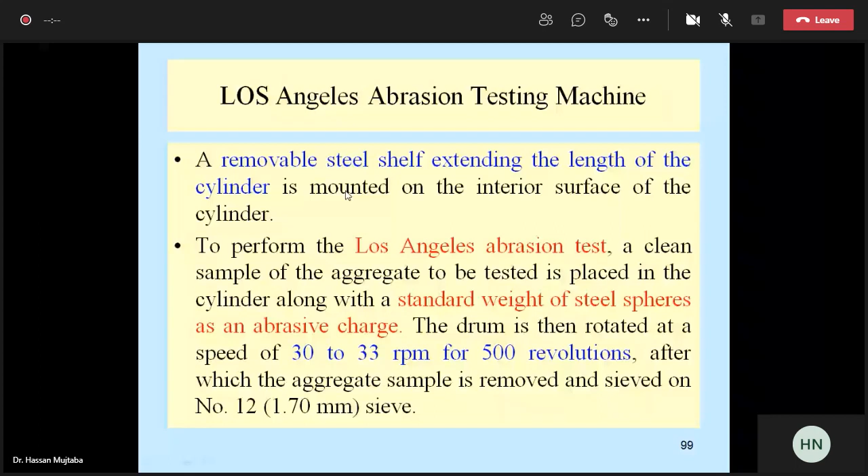After which the aggregate sample is removed and sieved on sieve number 12. The material retained on the sieve is washed, dried to constant mass and weighed. The difference between original mass and the final mass of the sample expressed as the percentage of original mass is reported as percentage, where Los Angeles abrasion value equals original weight minus final weight divided by original weight. So that is Los Angeles abrasion.

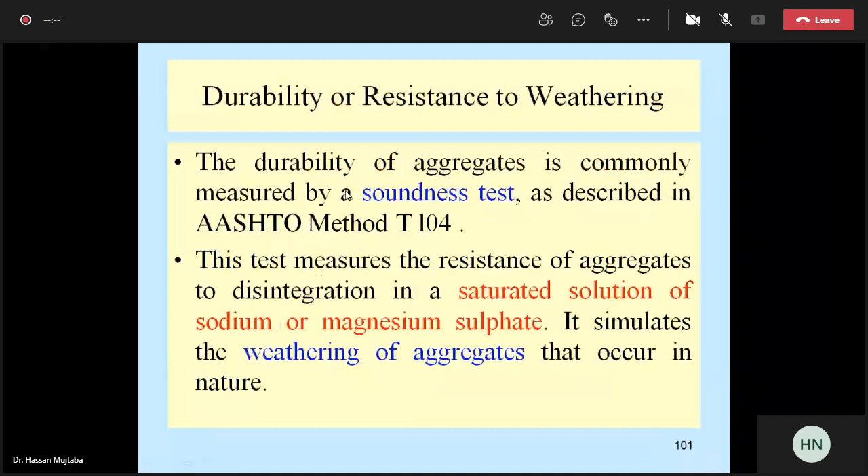So, original weight before the start of the test. After the test is complete, you are going to take the final weight, and then again you are having the original weight. So we are going to stop our lecture at this point.